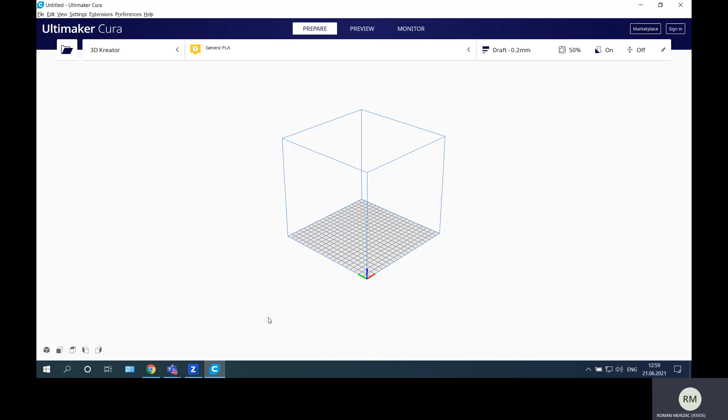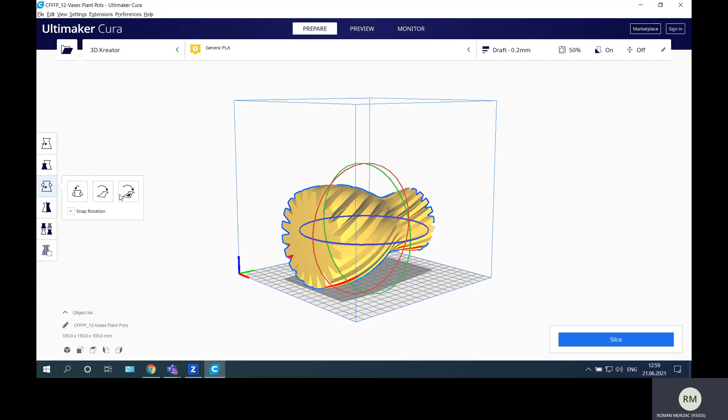First of all, I will open the Ultimaker Cura software and import the STL into the software from the downloads files. Okay, so here is the plant pots. Okay, first thing is to rotate the part. Yes, so I will take the rotate and say face align. So this will be my face align, and here should be 0 and 0.

Yes. So this is a very big part, you see, so we can scale it or we can print it like this. We can see that we have some surfaces that at first look need a support, but if we put support on these grooves, it will be very hard to remove this support, and it will be almost impossible to remove it from inside, because inside it's almost the same shape as on the exterior.

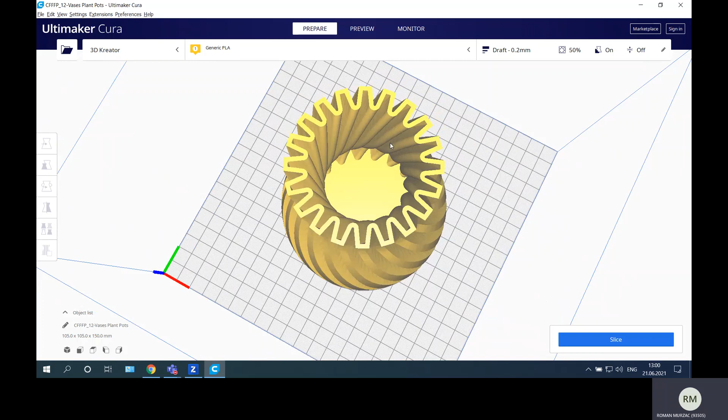So in this case we don't put the support structure, but we will decrease the speed of printing and we will increase the quality. So let's put the parameters. We will choose a fine profile, and this means the quality will be 0.1 millimeters. The shell will be 1 millimeter, 2 layers. The infill will be 50. No, 30 will be enough.

Grid type pattern. Yes. Material will be 210 degrees for the extruder and 60 degrees for the build plate. I will decrease the speed to 40, and the infill speed also to 40, and the wall speed and initial layer speed to 20 millimeters per second, in order to print it very slow. Cooling will be enabled, the travel retraction will be enabled, the support will be not available, the build plate with no option, and these are the parameters, and just slice it.

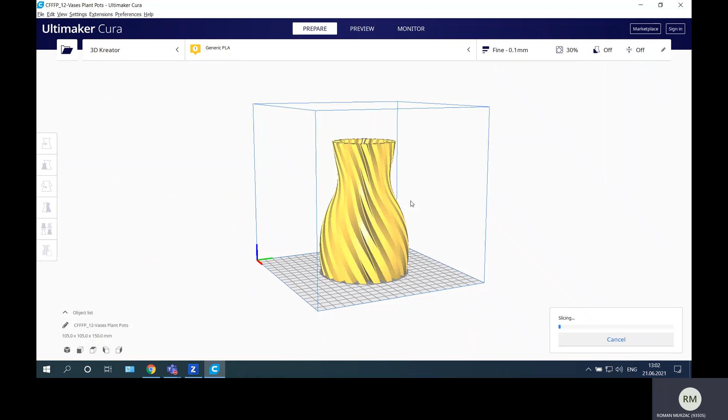It will take a long time to print, and the material consumption will be also big, because the part is big. It will take, I think, 50 hours or something like this. Let's see. We will simulate the process and see how long it takes and what the material usage will be for this product. Just wait for slicing, and after that we will analyze the results of this print process. It will take a while, because the file has complex surfaces, and the software takes time to slice it and generate the code.

So, as I said, it takes 57 hours and consumes 208 grams of material, and if we convert it into a cost in euro, it's €5.03. Just go to preview and we will see how this part will look, and wait for it to process the preview for this part, how it will look in the printed version.

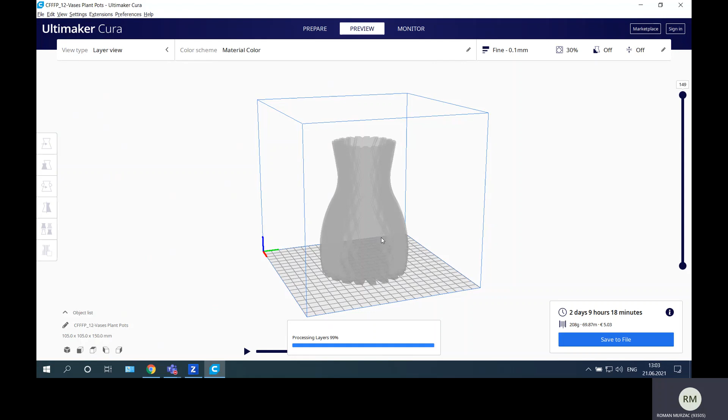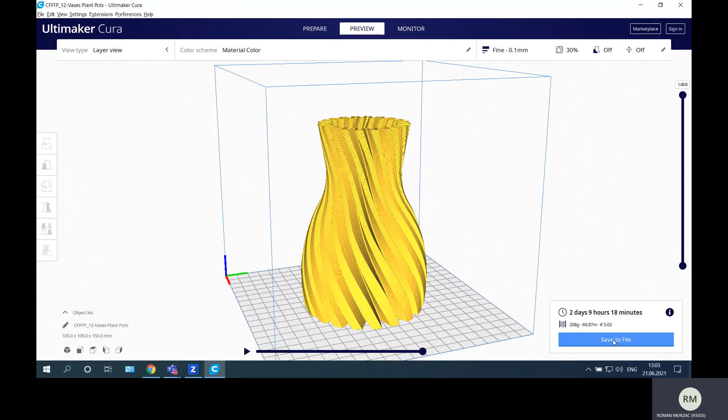So this is how it will look after it is printed, and you can see here each layer, and the layers are very smooth, because the height of each layer is 0.1, and the product will be of very good quality. Just save it, yes, on desktop, and save as plant pots. Save. I will save it.

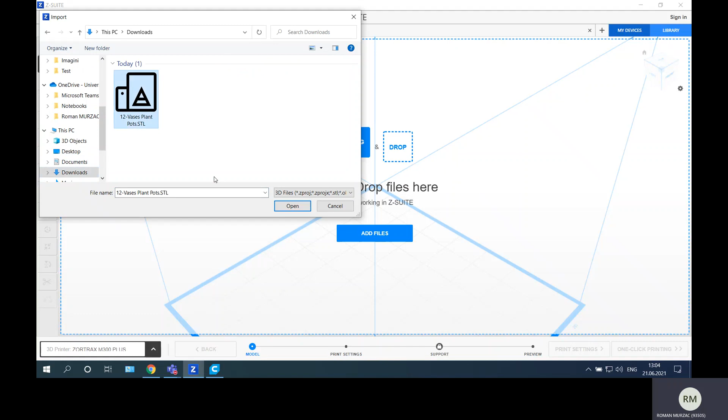Yes, it's saved. After that, we switch to a second software, the Zortrax M300 Plus. Start a new project, add file, and from downloads we upload the STL. Of course, it will come in the same position, and we will rotate it.

Yes, rotate face by face and select the bottom face. After that, go to printing settings, and here will remain Zortrax material, Z-HIPS. For support, I will put editable. Yes, why? Because I want to decide by myself if I want support or not. So I put editable, and I will choose to not generate the support. You will see in a few moments.

The nozzle is 0.4 always. The layer thickness, I will keep 0.19 here because it's a very big part, and the quality normal. Yes, it will be enough. The type of trajectory normal and the pattern perpendicular, or pattern 1. The infill 30%. 5 layers on top surface, 5 layers on bottom surface.

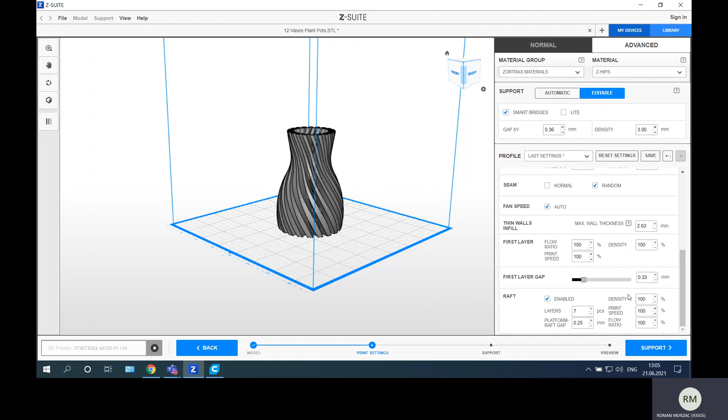The seam of the layer switch to be random, and the first layer gap to be 0.33 millimeters and the platform raft gap 0.25 millimeters. Support. So now the software is prepared to generate support, and it's prepared the file to add the support manually or generate by myself. But I will skip these options and my part will be generated without support. You will see it after the preparing support data will be ready. So just wait a few moments for the software to perform this process of preparing the support.

It will take time because the part has complex surfaces and the software should generate the trajectory and the surfaces for each potential layer of this part, so just wait for it.

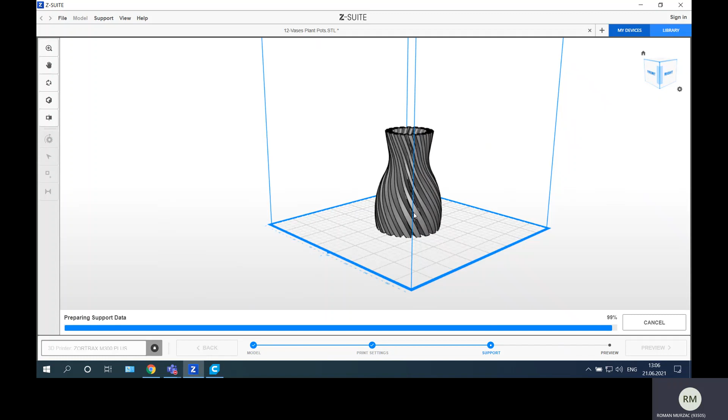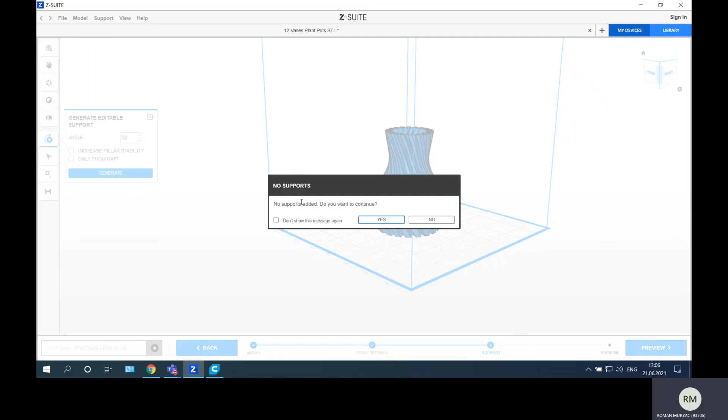Okay, so here is the option to generate editable support. From here, I can choose the angle of overhang surfaces. I can increase pillar stability. I can put supports just from raft and I can generate, or I can add them manually. But I will go to preview without clicking the generate button. So the software says you didn't add the support. You want to do it without support, and I will say yes, I want to generate this file without support.

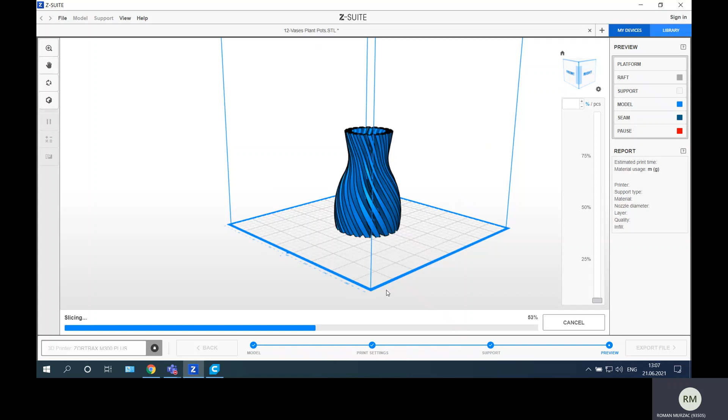So these are the options with editable support, and this is the case when, on a part that needs support, I prefer not to add the supports and print it without supports, because here the angle is not big. If you remember, there are 15 degrees. So it's 90 from here to here, but if I take each surface, it's 15 degrees, so it's not a big angle of overhang surfaces, and the software and the printer are able to generate these surfaces at this angle.

So just wait for slicing the part, and after that we will see the preview of the part and analyze it, and after that we will save the Z-code in order to put it on the Zortrax printer. So the slicing process is almost ready. After that it will prepare the preview, and then it will be available. Now generating the path, and now generating the preview.

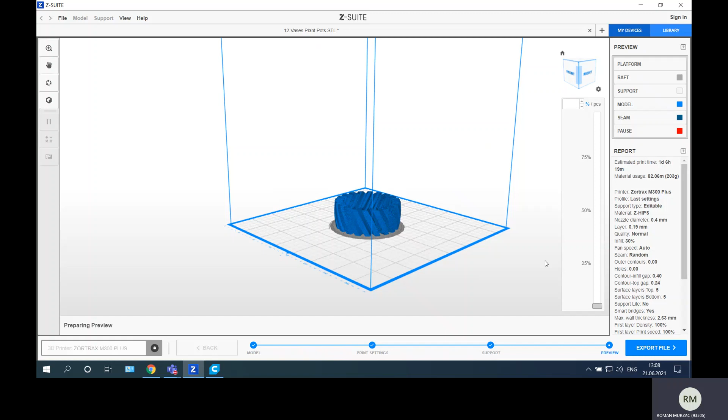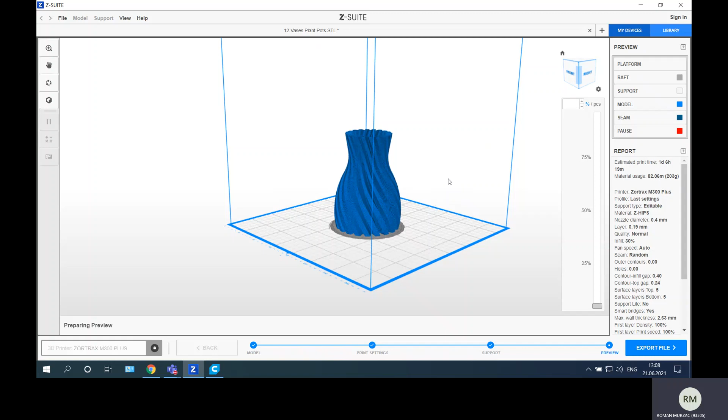And this is how the part will be built without support. You can observe this, and you can see here it's 30 hours and 19 minutes for printing and 203 grams of material. So in this case, it's also most convenient to print this part on the Zortrax printer, because it takes less time and less material. Okay, this is the part without support. So this is how we will print it and how it will look.

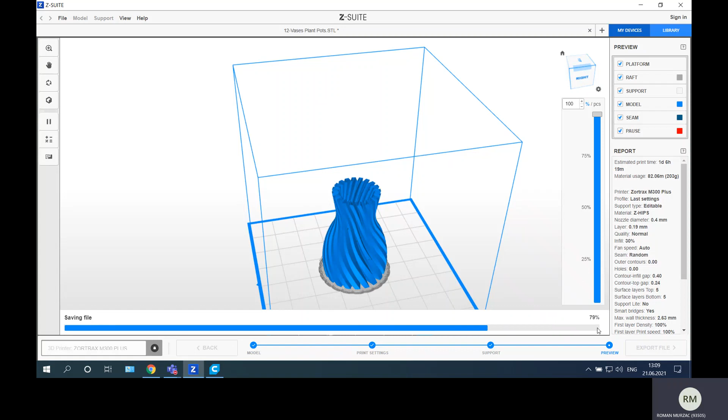Okay, after we check it, we go to export file, and of course on desktop I will export the vase and save this. After saving, it will appear here. It's just saving the file now, and we'll go see the files on desktop. Both files for both printers, for 3D Creator and for the Zortrax printer.